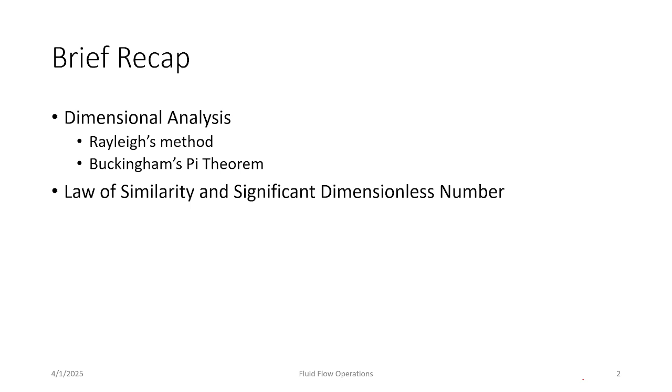Last week we discussed dimensional analysis, law of similarity, and significant dimensionless numbers. This week we'll discuss compressible flow, including thermodynamic characteristics of a compressible flow. We'll also discuss the speed of sound or sonic velocity, then look at Mach number, and try to understand the basic equations of one-dimensional compressible flow.

To begin with, compressible flows occur when the density changes are significant between two points on a streamline. Fluids have the capacity to change volume and density, be it with temperature or pressure. This phenomena is called compressibility — the ability of fluids to change volume and density.

As gas properties change, compressibility also changes — the ability to get compressed varies. When you compare liquid and gases, gas has large compressibility compared to liquids. But depending on the characteristics of the gas, compressibility will vary, so not all gas flows are compressible flows. Only those with significant density changes are compressible.

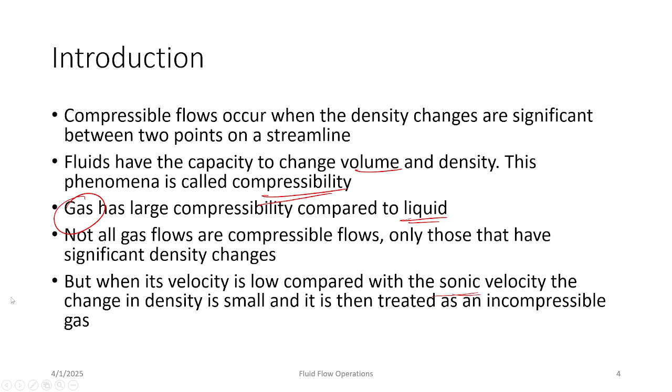Coming to incompressible gas flow — this occurs when the density of air does not change by more than 3% between the points of interest, and is consequently treated as incompressible gas flow. So let's say this is the initial and final point, or point of interest. If the gas or air does not change its density by more than 3% between these two points, it is considered incompressible flow or incompressible gas.

If the density changes are less than 3%, it is considered an incompressible flow. We have many examples: flow around automobiles, flow in hurricanes, flow around aircraft during landing and takeoff — this is also considered incompressible flow — and flow around buildings and communication towers, also considered incompressible gas flow.

Coming to compressible flow — we already know that if the density change is less than 3% between two points of interest, it is incompressible. So obviously, gases with more than 3% change are considered compressible flow. Gas flows in which density changes more than 3% are called compressible gases or compressible flow. For example, airflow around aircraft flying faster than 100 meters per second.

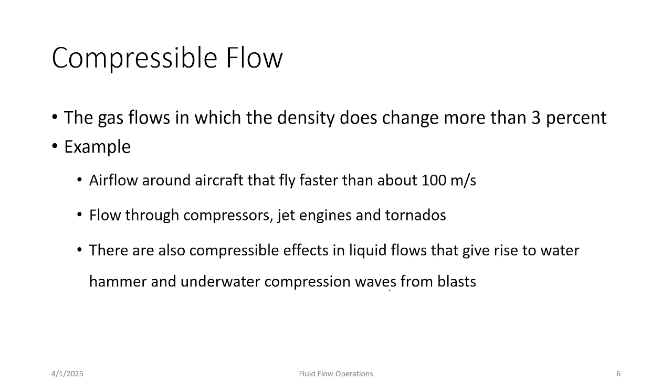Whenever a flight is landing and taking off, it is considered incompressible flow, but when the aircraft is flying at high speeds like 100 meters per second, it is considered compressible flow. Flow through compressors, jet engines, and tornadoes is also considered compressible flow. There are also compressible effects in liquid flows that give rise to water hammer and underwater compression waves from blast. These are different examples of compressible and incompressible fluids or gases and liquids.

So how do you express this compressibility? When a gas is getting compressed, how do you express it? Let's say you want to express the quantity of a gas — you can express it in number of moles, or you can also express it in terms of volume.

Let's say you have 3 liters of liquid, or 5 moles of gas. You can quantify it, right? But if a gas is getting compressed, how do you quantify the compressibility of that particular gas or liquid? There is something called bulk modulus, using which this parameter will help us understand the compressibility.

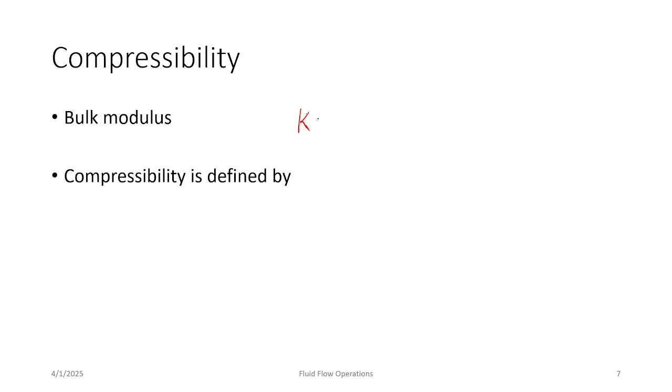So how do you define bulk modulus? It is defined by variable K, and K is equal to pressure change upon del V by V. We can also write this as minus V into dP by dV. This is called bulk modulus.

I'll also tell you how to calculate this. Let's say we have a container attached to a pressure transducer or some pressure measuring device, and there's a piston inside this, connected here. Let's say there's a piston inside, and the initial volume is V and the corresponding pressure is P. When you're applying some pressure on this piston, what happens?

This will be moving through a certain displacement, right? Let's say the volume change is del V and the pressure change is del P. So the final volume will be V minus del V, and the final pressure will be P plus del P, because pressure is increasing and volume is decreasing. So volume will be V minus del V and pressure will be P plus del P. From this you'll be able to calculate the bulk modulus - the change in pressure and change in volume.

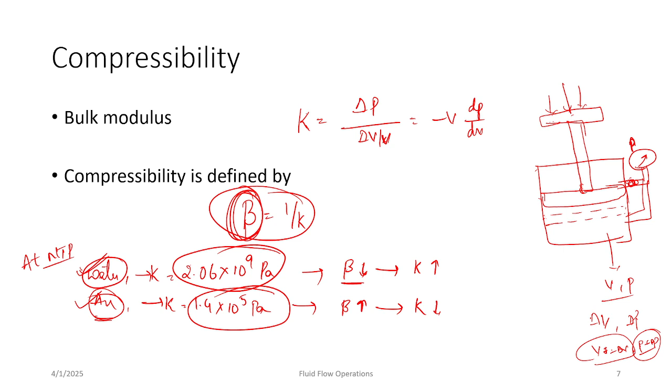So K is higher in case of water and lower in case of air. I'll also give you a value of beta for water. Beta is 4.85 into 10 power minus 10, 1 by Pascals. Just take inverse of this and you'll be getting the value. Same thing here - just take inverse of this, 1 by 1.4 into 10 power 5, and you'll be getting the value of compressibility.

How do you relate density and volume? Let's say density and volume are inversely proportional, right? We can take PV is equal to nRT. Or we also have another equation. Let's say if volume is increasing, what happens to the density? Density will reduce, right?

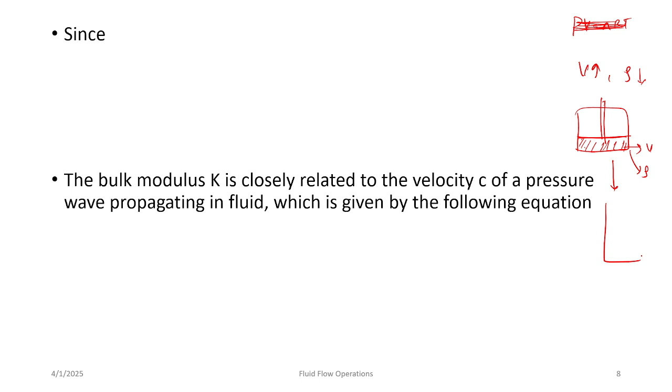So let's say you have a container with a piston as well, and I'm entrapping the gas in this. Let's say there is some gas and the initial volume is V and the corresponding density is rho. In the next case, I'm increasing the volume of the gas. So now the volume of the gas is increased. What will happen to density? Density will obviously decrease, because density is equal to mass by volume. If volume is increasing, then density will reduce. So we know that this will remain constant.

So this product will always remain constant. Instead of volume, here we can also write density because their product is always constant. So we can just write V is equal to m by rho and then substitute in this particular equation. We'll be getting rho into del P by del rho, which we can also write as rho into dP by d rho.

Bulk modulus can also be calculated using volume changes, or in terms of density changes, and we'll get the same value since the mass term gets cancelled out. When substituting, you get a mass term in both places, and since mass is a constant, its differential cancels out. So in both terms you'll have mass, and both of them cancel out, giving us this equation.

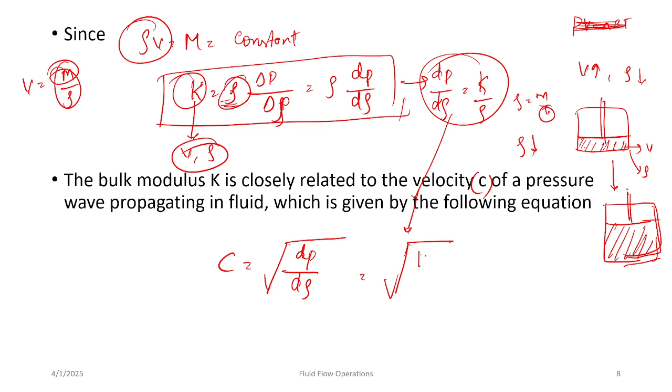Bulk modulus is closely related to the velocity of a pressure wave propagating in a fluid, so we can relate it with velocity as well. All these derivations are out of scope, so I'm not going into the derivation part and directly writing the equation: dP by d-rho, which if you substitute the variables, can be written as K by rho. So I'll substitute it here and get K by rho.

Coming to thermodynamic characteristics, a gas has the following relationship between absolute temperature and pressure. For almost all gases, PV is equal to nRT, or RT.

And R is R naught by M. The value of R naught is 8.314, or 8314 joule per kmol Kelvin. We generally use R naught here, but for real gases it will be R, whose value is R naught by M, where M is the molecular weight of that particular gas.

Let's take air as an example. For air, its molecular weight is 28.96, so the value of R becomes 8314 by 28.96, which equals around 287 joule per kg Kelvin.

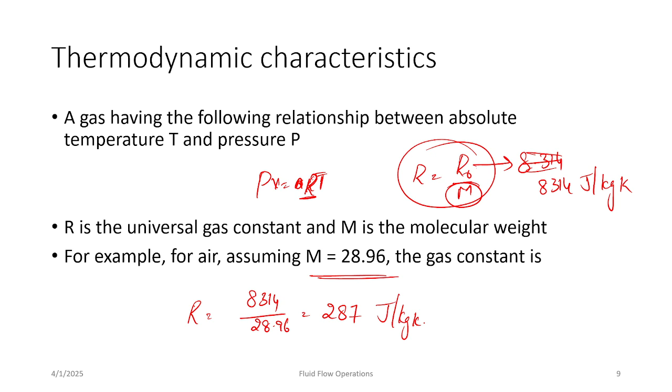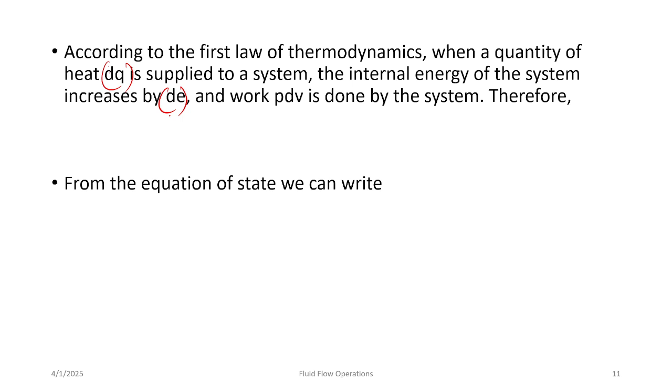According to the first law of thermodynamics, when a quantity of heat, let's say dq, is supplied to a system, the internal energy of the system increases by an amount dE, and work PdV is done by the system. So you can relate all these variables using dq is equal to dE plus PdV - whatever energy you supply is used for increasing internal energy and also to do work.

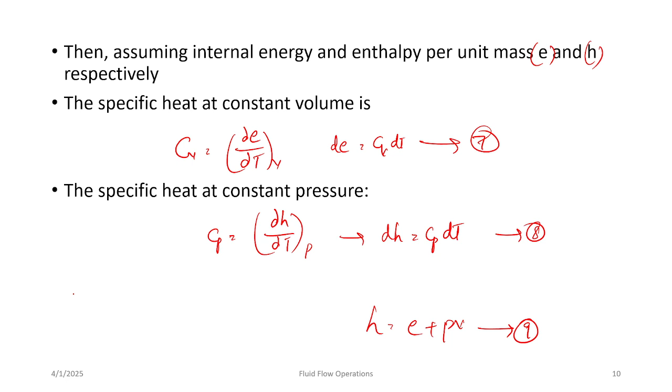From the equation of state we can write PdV plus VdP is equal to R into dt - just integrate PV equals RT and you will get this equation, equation 11. And from equation 9, just differentiate to get dH is equal to dE plus PdV plus VdP - this will be equation number 12.

Okay, so in case of constant pressure change, dP will be zero because pressure is constant. So in that case, equation 11 and 12, this will become zero, and this will also be zero. So in that case, it will become PdV is equal to RdT.

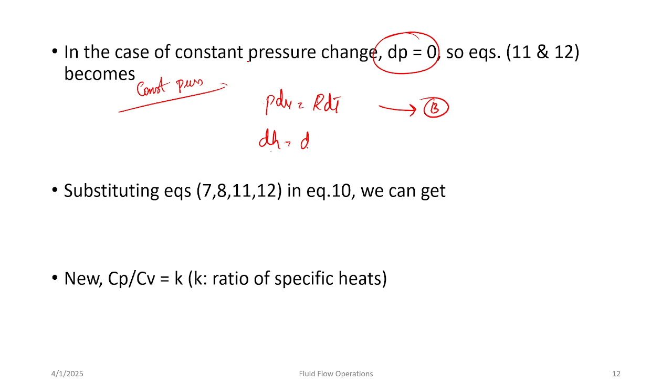This is at constant pressure. And the equation number 12 becomes dH is equal to dE plus PdV, which is equal to again dQ.

So from equation 7, 8, 11 and 12 we can write Cp minus Cv is equal to R, which is equation number 15. And now we also have a relation between Cp and Cv, so that is Cp by Cv will always be constant, that is equal to K. We can also write Cp is equal to K by K minus 1 into R, and Cv as 1 by K minus 1 into R.

Okay, so all these relations you will be anyway discussing in thermodynamics. I'm just trying to revise these concepts, and we may also determine the entropy change or assume an isentropic process, that means change in entropy is zero, ds is equal to zero. So then one of the following equations can be used, that is,

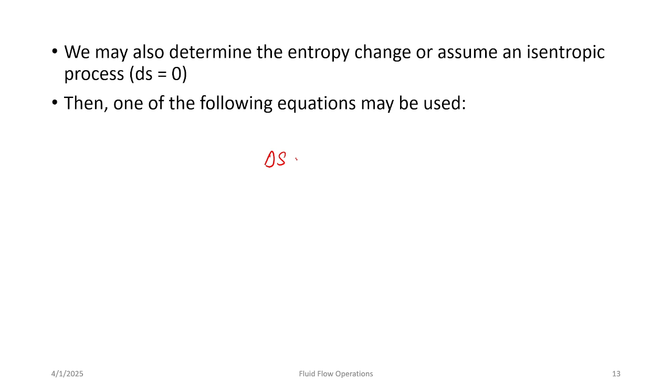ds is equal to Cp into ln T2 by T1 minus R into ln P2 by P1. So we can write T2 by T1 as P2 by P1. If ds is zero, if we are talking about an isentropic process, then ds will become zero, so then you can just

simplify this equation to any of these forms. That is, T2 by T1 is equal to P2 by P1 power k minus 1 by k. Or we can also write P2 by P1 is equal to rho 2 by rho 1 power k, or you can also write T2 by T1 is equal to rho 2 by rho 1 power k minus 1. Let's say this is equation number 18. You just have to separate these variables.

So this will become 0, right? So take any of these terms to the other side. So if you just substitute this as 0 for an isentropic process, we'll get Cp into ln T2 by T1 is equal to R into ln P2 by P1. Then simplify this equation and you'll be getting these forms. You need to also use this equation, and these equations, and you'll be able to get these forms.

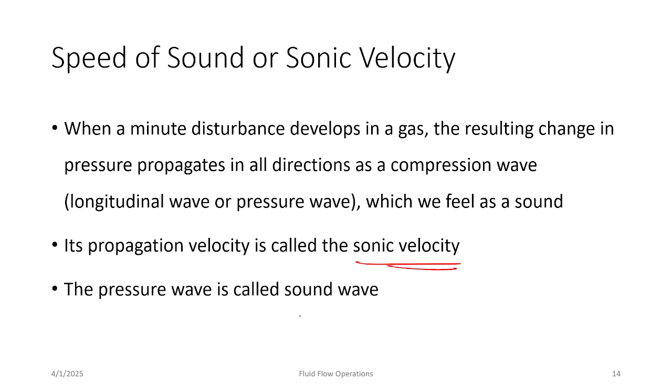So coming to speed of sound or sonic velocity. When a minute disturbance develops in a gas, there will always be a change in pressure. So the resulting change in pressure propagates in all directions as a compression wave, also called a pressure wave or longitudinal wave, which we feel as sound. So its propagation velocity is called sonic velocity, and the pressure wave is called sound wave.

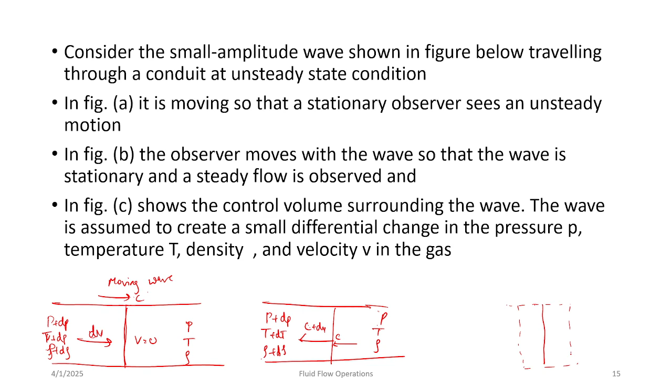So consider the small amplitude wave. Let me just draw it here. Let me draw three cases.

So consider a small amplitude wave traveling through a conduit at unsteady state conditions. In figure A, B, and C. So in figure A, it is moving so that a stationary observer sees an unsteady state motion, and in figure B, the observer moves with the wave so that the wave is stationary and the steady state flow is observed. And in figure C, it shows a control volume surrounding the wave, and the wave is assumed to create a small differential change

in the pressure, temperature, and density rho, and also velocity of the gas. So if there's an unsteady state disturbance, if the observer is stationary, then he'll find the wave to be unsteady state. And if the observer is moving with the velocity of the wave, then he'll find that it is a steady state. And this is a control volume around the wave, and it represents all the changes in the gas, like volume change, pressure change, and temperature change.

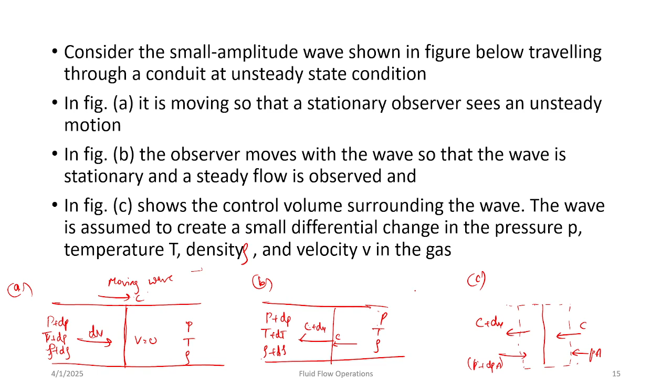Okay, let's say equation number 20. So the momentum equation in the streamwise direction can be written as P A minus P plus dP into A is equal to rho A C into C plus dV minus C. So if you simplify this, you'll be getting dP is equal to minus rho C dV. This will become equation number 21.

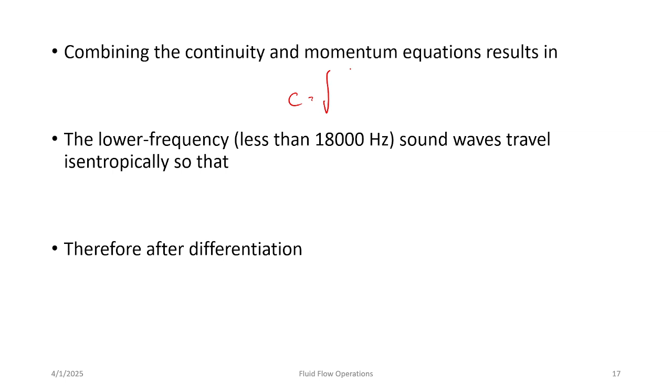So if you combine the continuity equation and momentum equation, it will result in C is equal to square root of dP by d rho. This is equation number 22.

So the lower frequency sound waves travel isentropically. The equation becomes P by rho power k is equal to constant. This is only for lower frequency sound waves. And if you differentiate this equation, we get dP by d rho is equal to k into P by rho. That's equation number 23, and this is 24.

So coming to speed of sound or sonic velocity for such waves, it can be written as C is equal to square root of dP by d rho. Just substitute dP by d rho as k into P by rho, so we get square root of k into P by rho, which can be simplified as square root of k into R T. This is equation number 25.

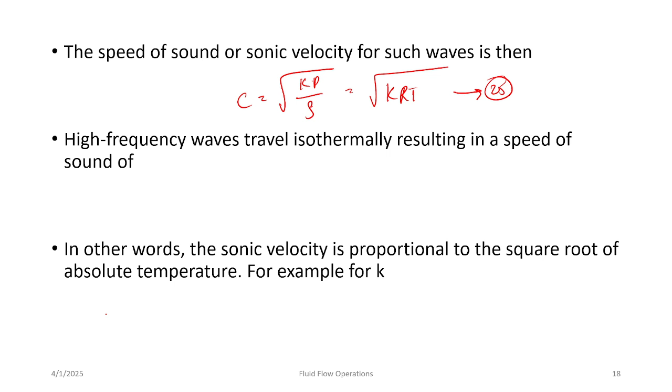So this is only for low frequency waves. Coming to high frequency waves, they travel isothermally, resulting in the speed of sound. In that case, C will be equal to square root of R T. So this will become equation 26. In other words, the sonic velocity is proportional to the square root of absolute temperature.

Let's take an example: for K equal to 1.4 and R equal to 287, which is the case of air, C will be equal to 340 meters per second, at 16 degrees centigrade or 289 Kelvin. So this is how you calculate the speed of sound.

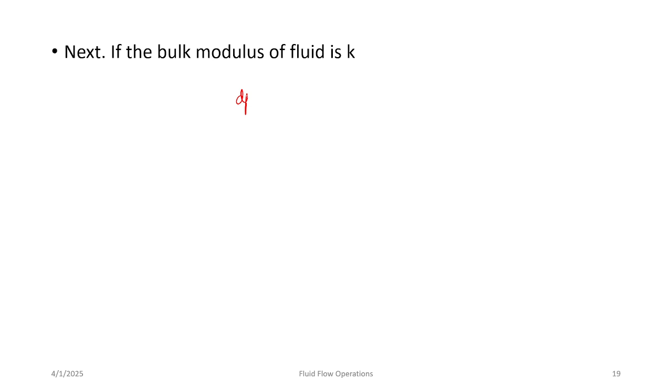And let's say K is the bulk modulus of that particular liquid. We already have the relation dP is equal to minus K into dV by V. The initial equation was K is equal to minus V into dP by dV. We just simplified in terms of dP, rearranging the terms to get it in terms of dP.

So this can be written as K into d rho by rho, because rho V is equal to constant. If you differentiate this, you'll get this equation: minus dV by V will be equal to d rho by rho, as they're inversely proportional.

And we also have a relation that dP by d rho is equal to K by rho. Using these equations, we can write C is equal to square root of dP by d rho. Substituting the variables, we can write this as square root of K by rho. This will be equation number 27, 28, and this will be 29.

So coming to the concept of Mach number: at the stagnation point of a body placed in a uniform flow, the pressure increases following del P is equal to rho u square by 2. The increased pressure brings about an increased density, which can be calculated by del rho is equal to del P by c square, equation number 31.

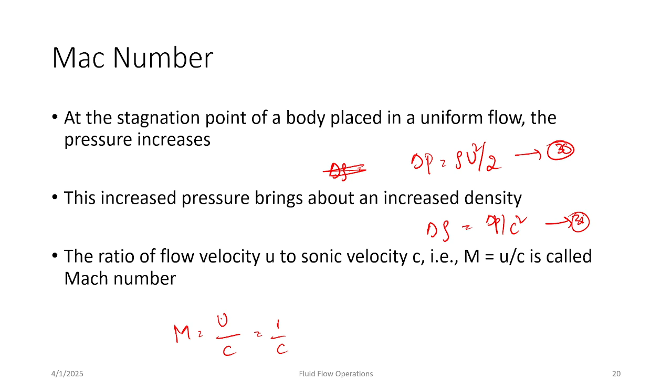And the ratio of flow velocity u to the sonic velocity c is called Mach number, represented by m is equal to u by c. So m is equal to u by c, which will be equal to 1 by c into the velocity of flow, calculated as square root of 2 into del P by rho, which will give us 2 into del rho by rho. This becomes equation number 32.

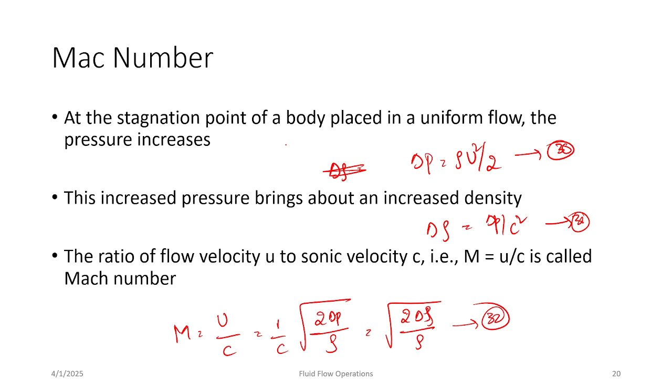So from this equation, the Mach number m corresponding to density changes of 5% is approximately 0.3. So if the density changes are within or correspond to 5%, then the Mach number is estimated to be 0.3. For this reason, steady flow can be treated as incompressible flow up to around Mach number of 0.3.

If the value of M is less than 1, the flow is considered subsonic. And if the value of M is greater than 1, it is considered supersonic flow.

The small magnitude waves are referred to as Mach waves, and they result from a source of sound, needle-nose projectiles, and the sharp leading edges of supersonic airfoils. The large amplitude waves are called shock waves, which emanate from the leading edge of blunt-nosed airfoils. So we have two types of waves: small amplitude waves and large amplitude waves.

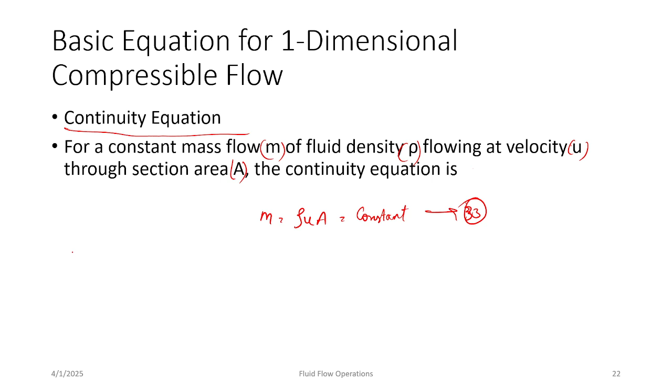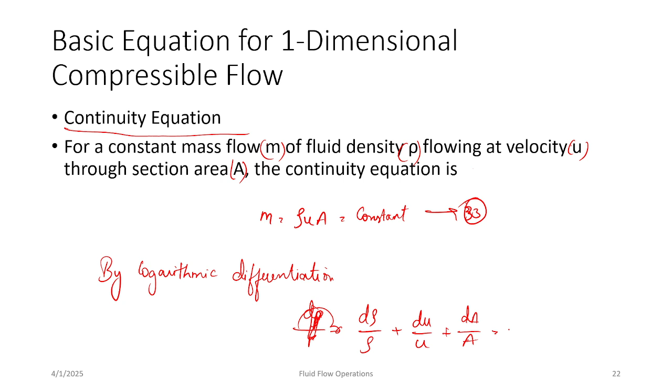By logarithmic differentiation, we can write d rho by rho plus du by u plus dA by A equals 0. If you differentiate a constant, it becomes 0, so this will become 0.

Euler's equation of motion in steady state along a streamline gives us the integral of dp by rho plus half u squared equals a constant. Let's say this is equation number 35.

Using adiabatic conditions from equation number 23, we can write p equals m times rho to the power k, where m is a constant again, m equals constant.

If you derivate this equation and integrate, we get dp by rho equals the integral of mk times rho to the power k minus 2 times d rho, which equals k by (k minus 1) times p by rho plus a constant. Let's say this is equation number 36, and this is 37.

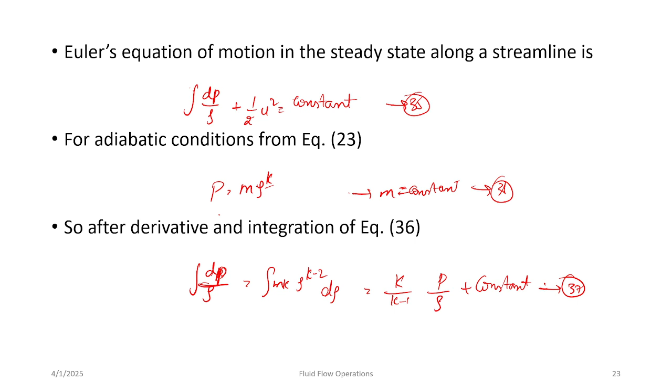Now coming to Bernoulli's equation for compressible flow. First let's write it for incompressible flow, then we'll write the same equation for compressible flow as well. Let's substitute equation 37 in 35.

We get k by (k minus 1) times p by rho plus half u squared equals a constant; that's equation number 38. You can also write this equation as k by (k minus 1) times RT plus half u squared equals a constant; that's equation number 39.

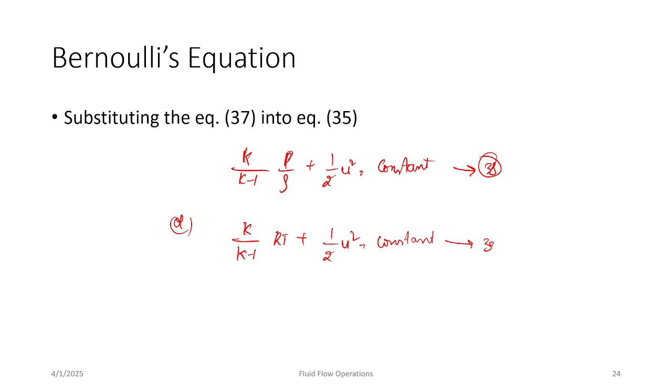Equations 38 and 39 correspond to Bernoulli's equation for a compressible flow.

The next concept is total temperature, static temperature, and dynamic temperature.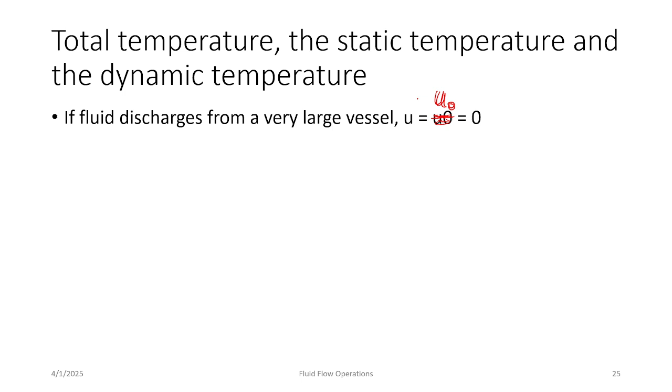If fluid discharges from a very large vessel, U will equal U naught, equal to 0, where the subscript naught represents a state variable in the vessel. So equation number 39 will give us...

T naught by T equals 1 plus half times 1 by RT times (k minus 1) by k times U squared, which equals 1 plus (k minus 1) by 2 times M squared. Here M equals U by C, the Mach number, which equals U by the square root of kRT.

Here T naught is the total temperature, T is the static temperature, and half times 1 by R times (k minus 1) by k times U squared is the dynamic temperature.

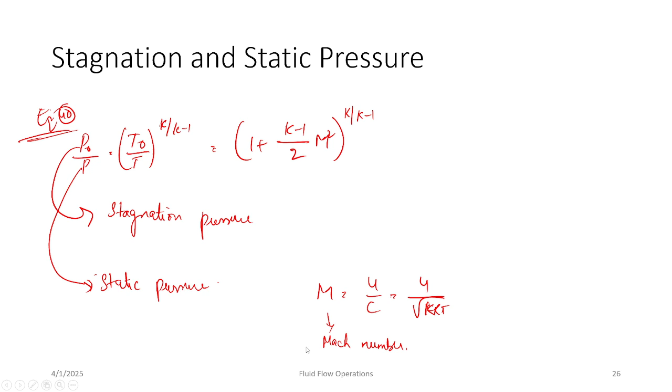So next topic is isentropic flow, which is flow in a pipe and effect of cross-sectional change. Let me just draw a diagram before going into the topic.

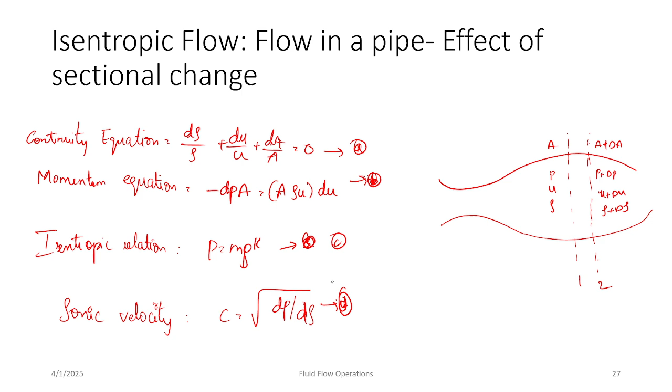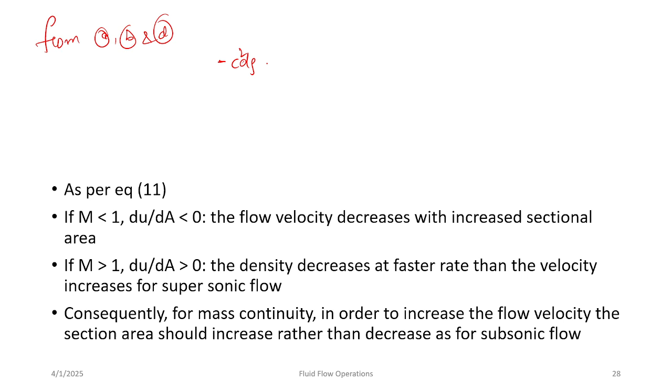Let's give numbering to this. Let's say this is 1, 2, 3, and 4, or let's name it A, B, C, and D. So from A, B, and D, we can write minus C square into D rho is equal to rho U du, is equal to rho U square into du by U. This becomes equation number E.

So that means we can write m square into du by u as minus d rho by rho, which will be equal to du by u plus dA by A. This becomes equation number F. So du by dA will be equal to 1 by m square minus 1 into u by A. This is equation number G.

As per equation number G, if m is less than 1 and du by dA is less than 0, the flow velocity decreases with increased cross-sectional area. And if m is greater than 1 and du by dA is greater than 0, the density decreases at a faster rate than the velocity increases for supersonic flow. Consequently, for mass continuity, in order to increase the flow velocity, the cross-sectional area should increase rather than decrease, as for subsonic flow.

So we'll just compare how supersonic and subsonic flow behaves when we are changing few variables. Flow state, then we have subsonic and supersonic, convergent and divergent. So we'll see how it behaves.

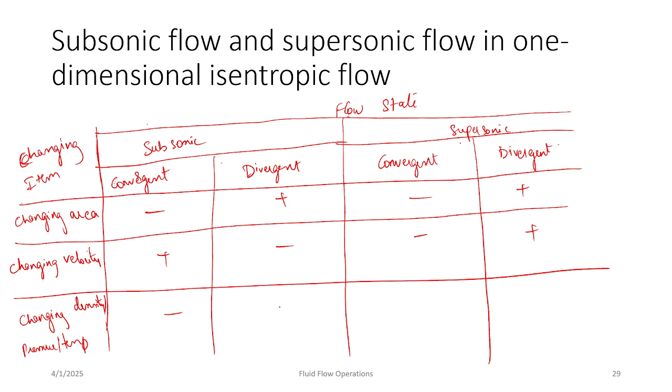So coming to isentropic flow, we'll take a case of convergent nozzle. Let me draw the figure first. Let's take the case of convergent nozzle.

This is P and this is P naught. Inside the vessel, these are the conditions: P naught, T naught, U naught is equal to 0, and this is rho naught. So assume a gas of pressure P naught, density rho naught, temperature T naught, flows from a large vessel through a convergent nozzle into an open air of back pressure, let's say PB, and this happens isentropically at a velocity u.

So you can look at this picture as well. Gas is flowing from the vessel, and the initial conditions are P naught, rho naught, T naught, and it is flowing from a vessel to open air through a convergence section, and the back pressure is PB.

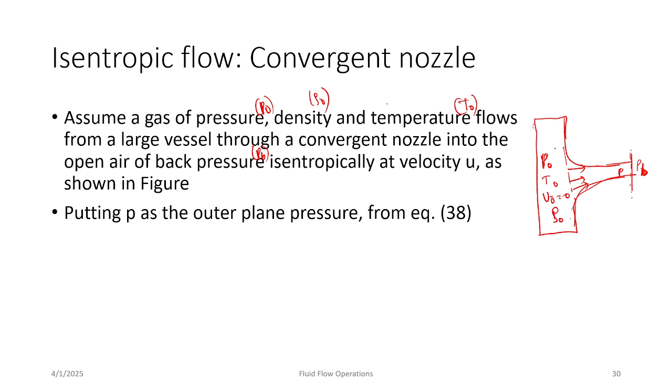So putting P as an outer plane pressure, we can write from equation 38 as K by K minus 1 into P by rho plus 1 by 2 into U square is equal to K by K minus 1 into P naught by rho naught. This becomes equation number H.

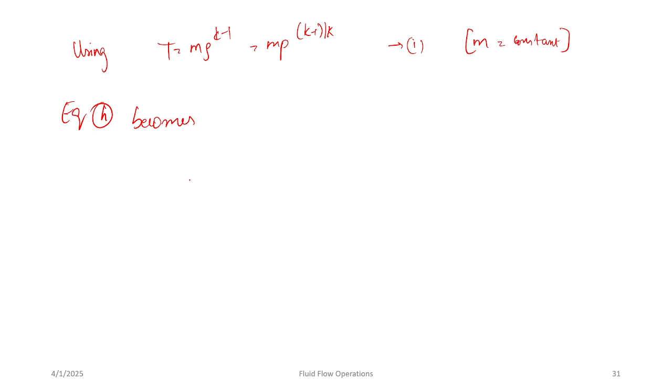This is equation number I. So equation number H becomes, from this, U is equal to square root of 2 into K by K minus 1 into P naught by rho naught into 1 minus P by P naught, power K minus 1 by K.

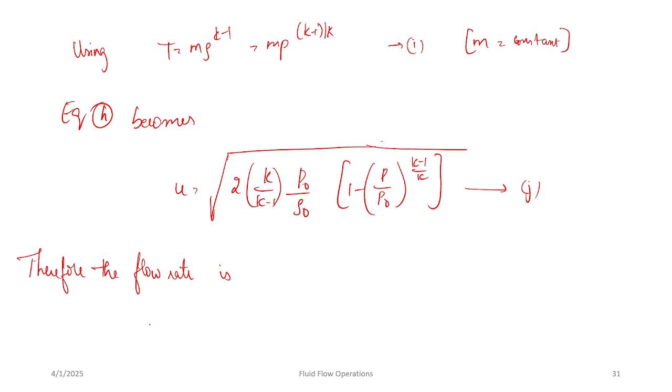And the flow rate becomes M equal to rho UA, which will equal area into, substituting other variables, 2 into K by K minus 1 into P naught. If you take rho into the square root, it becomes square rho square, and here rho naught and rho square get cancelled out. So you'll be left with P naught into rho naught into P naught by rho naught whole power 2 by K into 1 minus P by P naught power K minus 1 by K.

This becomes equation number K. Do you have any doubts until now? These are all mathematical derivations, mostly from thermodynamics. We're just trying to manipulate equations and solve the situation, or find the solution for that particular situation. Any doubts?

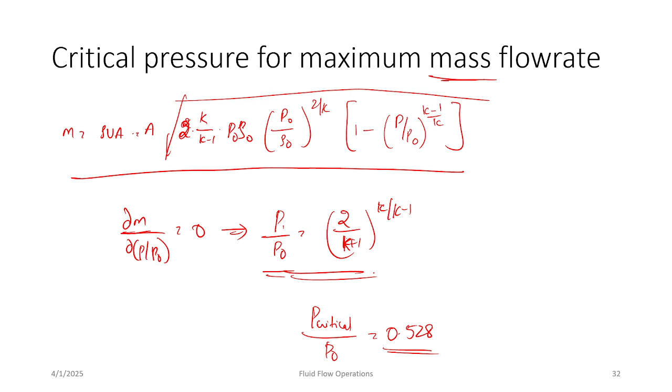So M is maximum for this particular value of P, and that pressure is called critical pressure. So for air, P critical by P naught will be 0.528. This is how you calculate critical pressure for maximum flow rate.

So coming to choked flow, let me first draw the diagram. This is the case: gas is flowing from a vessel through a converging section, and it is flowing out into open air.

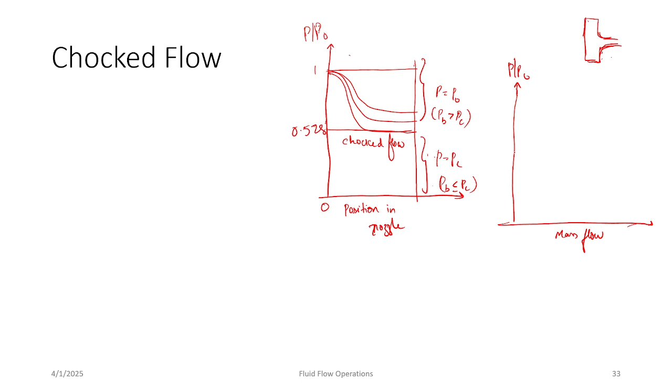And this is P by P naught. Then we have one more graph, that is for mass flow versus P by P naught. This is 0.528, and this is the maximum value. This is 1 and this is 0.

So the maximum flow rate, in this convergent nozzle case, will occur at P by P naught of 0.528 as shown in the figure. Therefore maximum flow rate occurs at P by P naught value of 0.528. However much higher the value of PB downstream is, however much lower the pressure PB downstream is, that pressure cannot propagate towards the nozzle because it is discharging at sonic velocities. Therefore the pressure of air at the outlet plane remains P critical. So the mass flow rate does not change, and in this state, the flow is called choked flow.

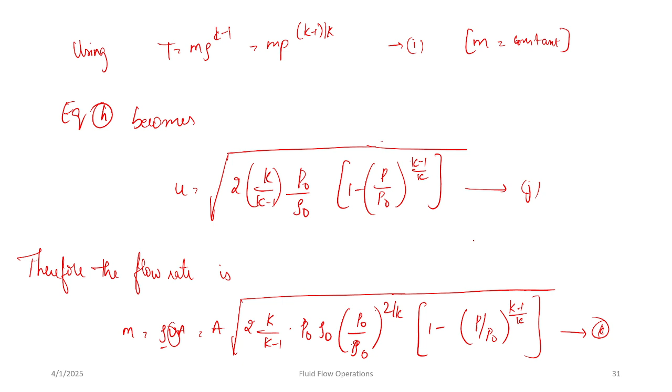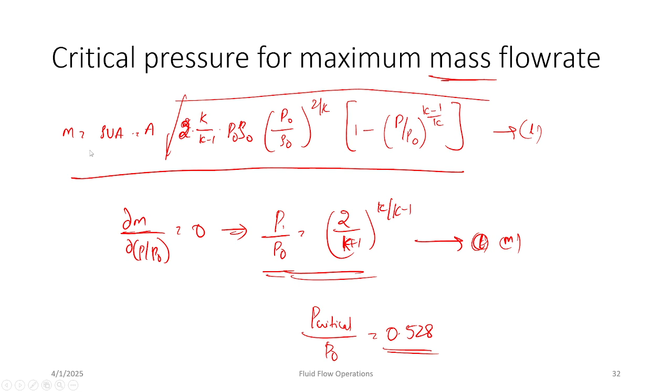And then we have critical velocity. Let's substitute equation number, what is it, let's say this is equation L and this is equation M. Substitute L into M, and also use P naught by rho naught power K is equal to P by rho power K. So you'll be getting your critical velocity.

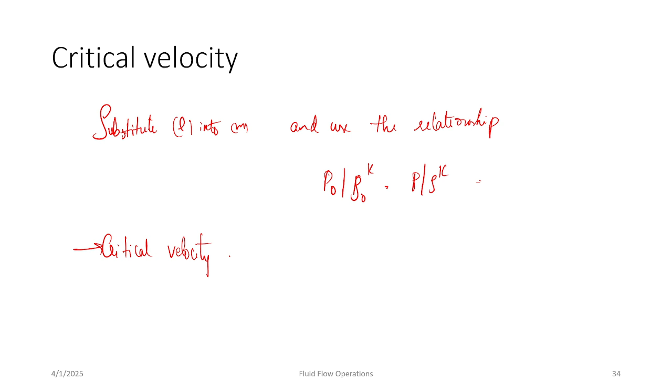That is, UC will be equal to square root of K into P by rho, which is again equal to the velocity of sound, or sonic velocity.

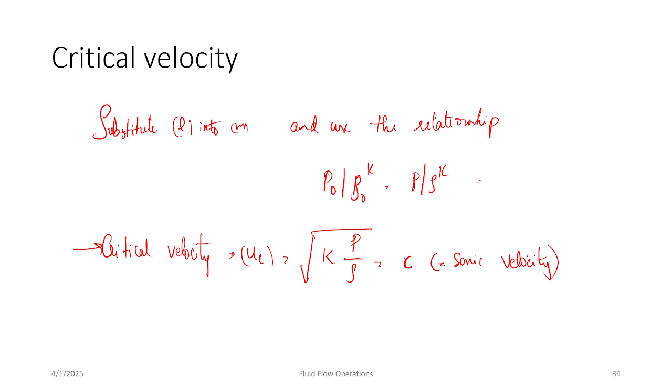And then we have critical density and critical temperature. For the condition of M equal to 1, critical density and critical temperature can be obtained at critical velocity. We can use this equation: rho c by rho naught equals 2 by k plus 1 whole power 1 by k minus 1. This should be equal to 0.634. And Tc by T naught will be equal to 2 by k plus 1, which is equal to 0.833.

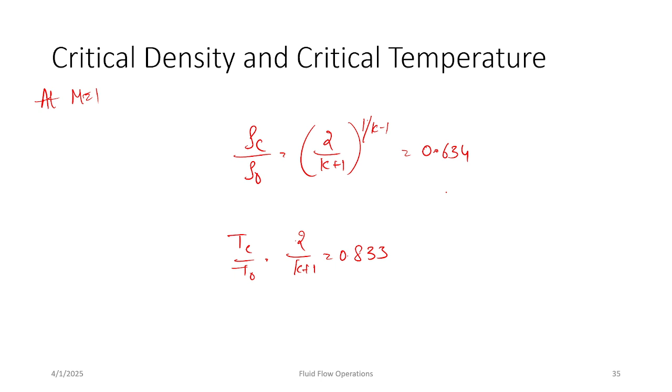At the critical outlet state of M equal to 1, the critical pressure falls to 52.8% of the pressure in the vessel, while the critical density and the critical temperature respectively decrease by 37% and 17% from those of the vessel.

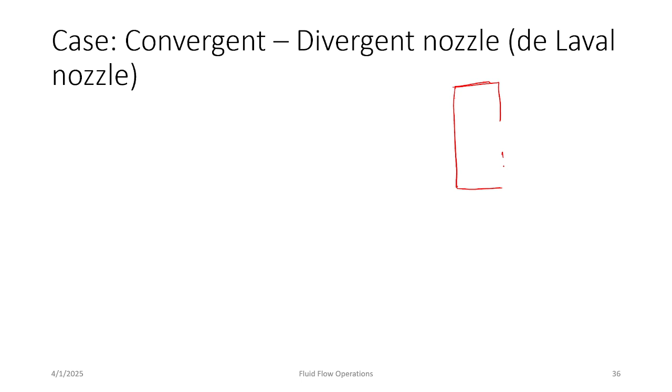Coming to the second case, that is convergent and divergent nozzles, also called a de Laval nozzle. We have two sections here, not one: a converging section and then a diverging section. Same as before, we have P naught, T naught, U naught, and rho naught, and this is trying to flow through this nozzle. This is the throat of the nozzle, and here PB is the back pressure. As shown in the figure, a convergent section is followed by a divergent length.

When back pressure PB outside the nozzle is reduced below P naught, flow is established. Obviously, the outer pressure should be lower than the pressure inside the vessel for flow to occur. So if you reduce PB to less than P naught, flow will be established. If the fluid flows out through the throat section without reaching the critical pressure, the general behavior is the same as for incompressible flow.

When the back pressure decreases further, the pressure at the throat section reaches the critical pressure, M equals 1, and supersonic flow will start to happen. So unless the back pressure is low enough, supersonic velocity cannot be maintained.

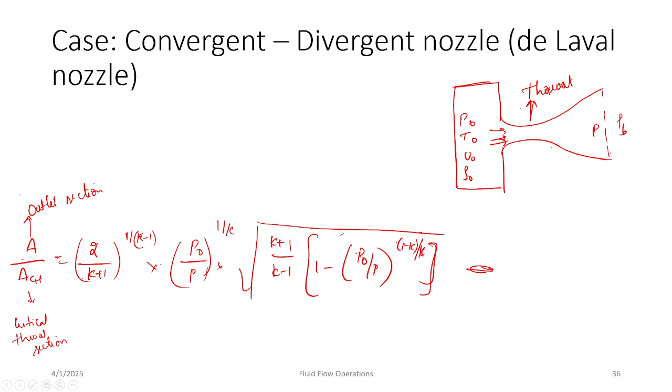Then coming to the concept of shock wave. When air undergoes large and rapid compression, a thin wave of large pressure change is produced. This can be observed, let's say, in a jet.

Whenever a jet is flowing or flying... just a second, someone is joining, I guess.

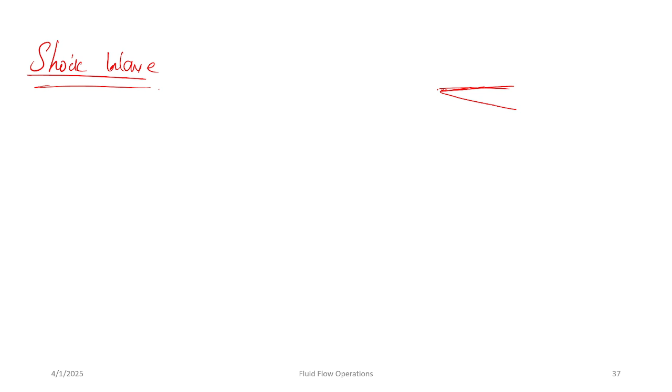Whenever a jet is flying at high speeds, I'm just drawing the initial section. The air which is adjacent to the nose or the tip of the plane will be undergoing large and rapid compressions, and as a result, a large pressure change is produced. Let's say this is a superjet, don't mind the drawing, flying at a very high speed.

As a result of this, the air adjacent to or in contact with the tip undergoes large and rapid compressions, and because of that, a large pressure change can be observed. Since the state of gas changes adiabatically, an increased temperature accompanies this increased pressure.

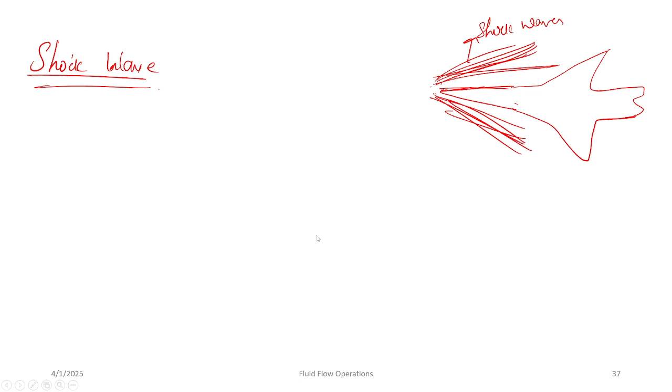The wave phase at the rear propagates faster than the wave phase at the front, which increases the pressure discontinuously. Such a pressure discontinuity is called a shock wave, which is only associated with an increase rather than a reduction in pressure in the flow direction. We have two types of shock waves.

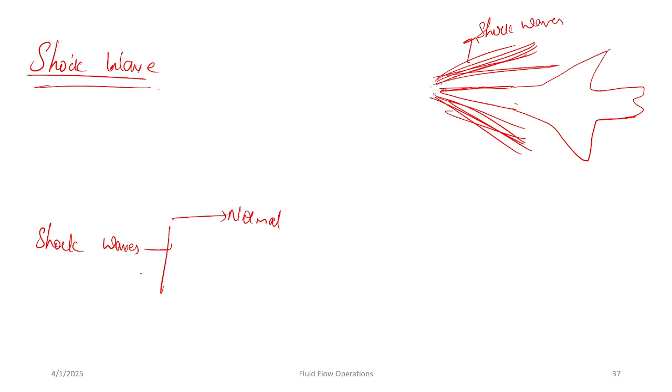One is normal shock wave, the other one is oblique shock wave. We'll look at each of them. First, let's look at normal shock wave.

As I've told you, shock waves are of two types: normal and oblique, both with respect to the direction of flow. If a long cylinder is partitioned with cellophane film or aluminum foil to give a pressure difference between the two sections, and the partition is ruptured, a shock wave is developed. The shock wave in this case is at right angle to the flow and is called a normal shock wave. The tube itself is called a shock tube.

So just take a long cylinder and partition it with a cellophane film or aluminum foil. I'll just quickly draw a diagram and show it to you.

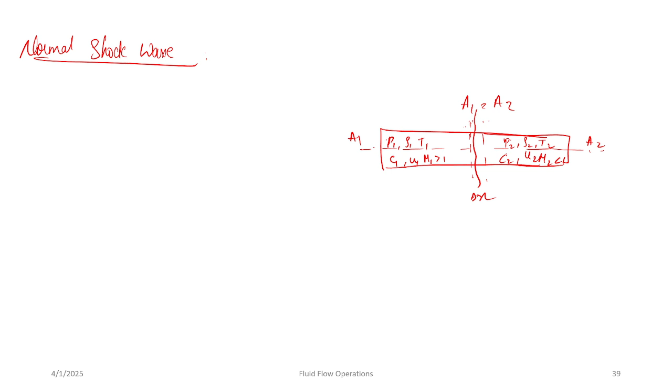So again, you can apply the continuity equation, momentum equation, and energy equation as well. If you apply the continuity equation, rho1 u1 A1 will be equal to rho2 u2 A2. The momentum equation becomes P1 plus rho1 into u1 square is equal to P2 plus rho2 u2 square. The energy equation becomes u1 square by 2 plus k by k minus 1 into P1 by rho1 will be equal to u2 square by 2 plus P2 by rho2.

This is again we have k by k minus 1. So using these two equations, we can write u1 square as P2 minus P1 by rho2 minus rho1 into rho2 by rho1, and u2 square as P2 minus P1 by rho2 minus rho1 into rho1 by rho2. So substituting the values of u1 square and u2 square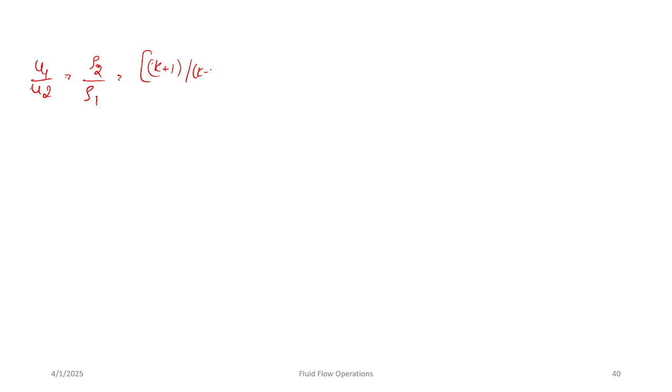in this equation, just substitute it. What would be the equation? I'll write down a simplified equation. So u1 by u2 will be equal to rho2 by rho1, which should be equal to k plus 1 by k minus 1 into P2 by P1 plus 1, divided by k plus 1 by k minus 1 plus P2 by P1.

Or we can also write it as T2 by T1 is equal to rho2 by rho1 is equal to k plus 1 by k minus 1 into... plus P2 by P1. And we can also write this divided by k plus 1 by k minus 1 plus P1 by P2. This equation shows the relationship between pressure, density, and temperature ahead of and behind a shock wave.

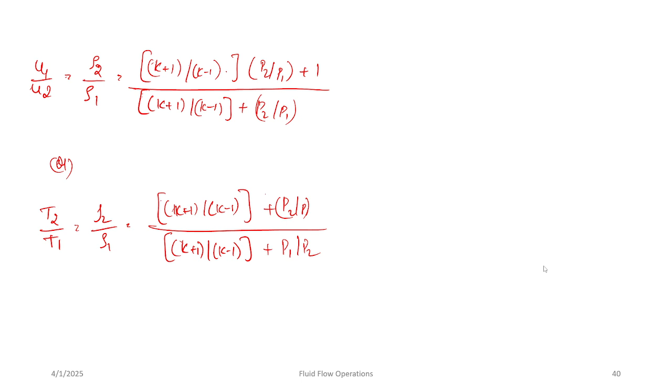And from the momentum equations, from these two equations, we can also write P2 by P1 is equal to 1 plus 2k by k plus 1 into m1 square minus 1. This can also be written as P1 by P2 is equal to 1 plus 2k by k plus 1 into m2 square minus 1. From this you can write m2 square is equal to 2 plus k minus 1 into m1 square, divided by 2k m1 square minus k minus 1.

So this is about normal shock wave, and we also have oblique shock wave. But let me just cover one more concept, that is Fanno flow and Rayleigh flow.

Just a second, someone is at my door. I'll just be back in a second.

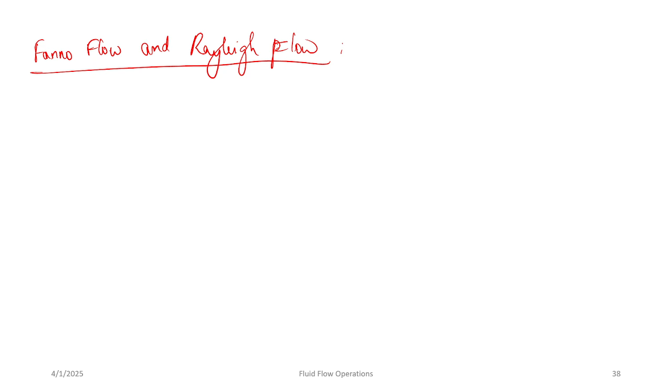Okay, so coming to Fanno flow and Rayleigh flow. First, let me draw a diagram for the graph. So this is enthalpy versus entropy.

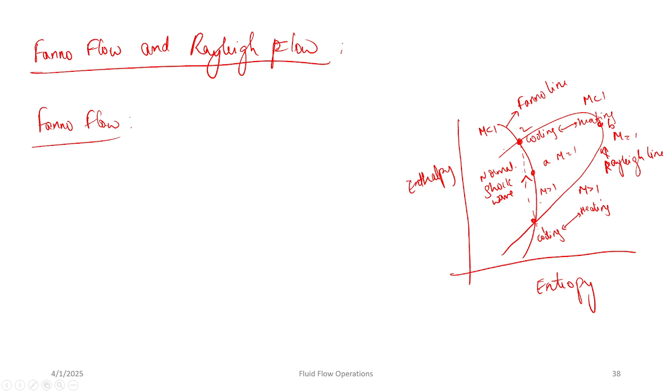Coming to second question, incompressible gas flow occurs when the density of air does not change more than 3% between points of interest, more than 5%, more than 7%, or all the above. So when do you consider it to be an incompressible flow? When the density change between two points of interest is less than 3%. So that will be option A, 3%, when the density change does not go beyond 3%.

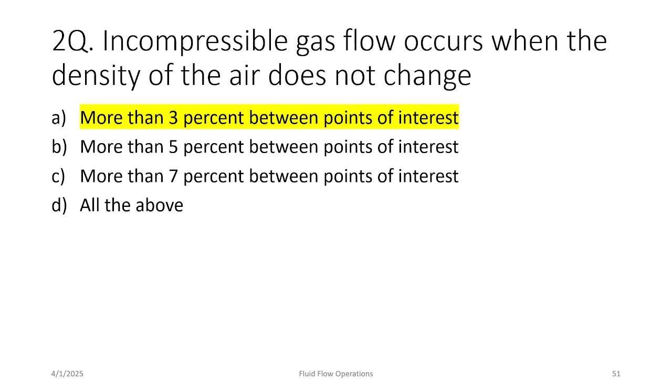Coming to third question, airflow around automobiles is compressible, incompressible, either A or B, or none of the above. So airflow around automobiles will be an example of incompressible flow, option B.

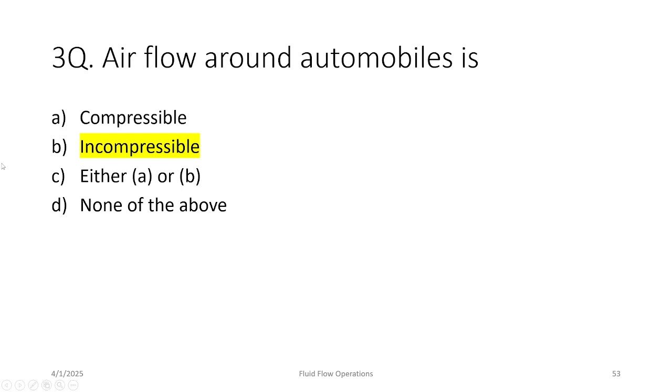Coming to fourth question, an example of a compressible flow is flow through a jet engine, flow in hurricanes, flow around buildings, or flow around aircraft during landing. So flow around buildings, flow around aircraft during landing, and flow in hurricanes are all examples of incompressible flow. So option A, flow through a jet engine, would be the correct answer as the compressible flow example.

Coming to fifth question, velocity of a pressure wave propagating in a fluid is directly proportional to K power 1.5, K square, or K power 0.5. It will be proportional to square root of K, which is K power 0.5.